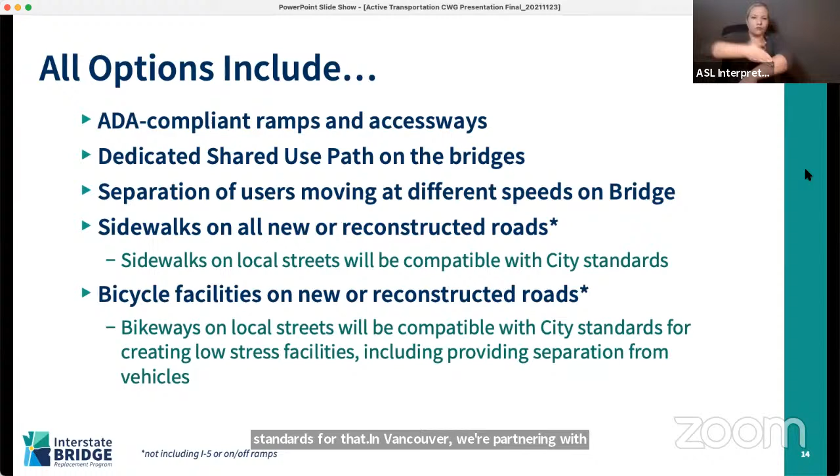Same thing for bicycle facilities—where a street is built or rebuilt as part of the program, it will include low stress bike facilities, including providing separation from vehicles. We looked at some of those pictures last time, the difference between just a striped bike lane on the asphalt versus one separated from traffic. City of Portland already has really good, strong, robust standards for that. In Vancouver, we're partnering with them as they develop theirs, so they're going to be pretty robust as well, and we're anticipating that.

Next slide. Where there are local street connections, those will be compatible with the local agency plans, for example the Hayden Island Master Plan. We don't know exactly yet where the transit stations will be—it depends on the type of transit included—but we know that we will provide great access to those transit stations, including bike parking and everything.

All of the options are going to include a reconstruction of the 40-mile loop trail. This is on the Portland side under I-5, closing a huge gap, a key gap in the network, and local street connections down into Northeast Portland. Many of the overcrossings across I-5 going north into Vancouver are going to be affected, and that's a great opportunity to improve the sidewalks and bikeways on all of those overcrossings—amazing opportunities for connections across I-5 and improving that for the communities. Wayfinding signage is assumed as well.

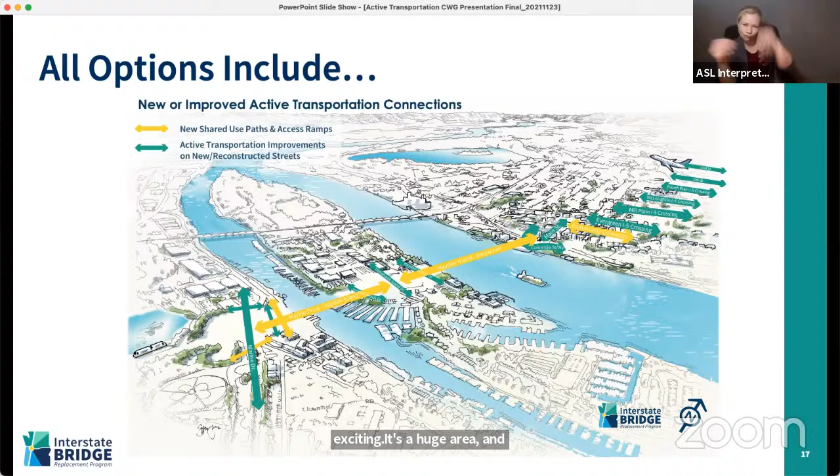Okay, next slide. And with that, we're going to talk a bit more. At the last meeting, we talked about the active transportation framework, and I want to revisit that just as a quick reminder so we can start to talk about how we're applying it. I'm going to introduce it and reminisce a little from what we talked about last time. Then we're going to dive into, like, that map I just showed is fine at a really big picture level—it shows the whole program area. We're going to break that down into North Vancouver, downtown Vancouver, and the Portland area, and have a chance to talk more about what all of this means. So let's dive in, and when we get to that I'll welcome comments from those of you very familiar with those areas.

Here we go, so just remember this—this is important. Anytime we talk about active transportation, we all recognize, and I heard some stories last time about how really horrible those conditions are out there today. Many of you know it intimately. So we aren't looking for a little bit better, we're looking for a lot better. And it's really important that we make it great and accessible for all. That's going to be critical for the communities and all the agencies to meet their goals for climate, for transportation, for community building, and for equity.

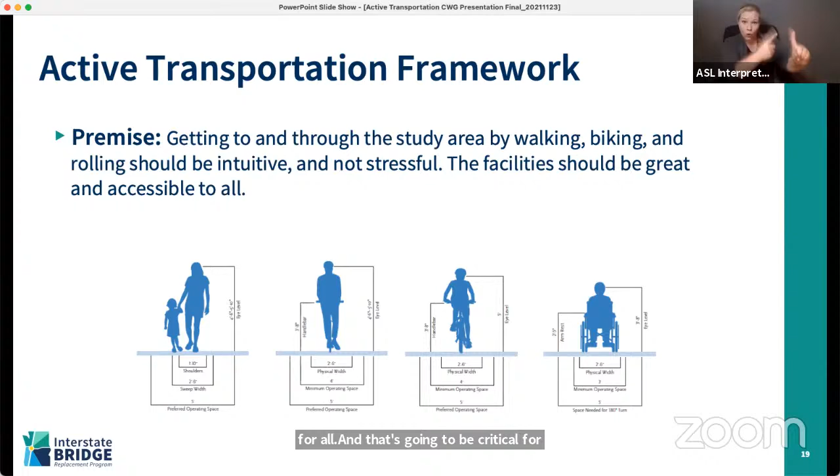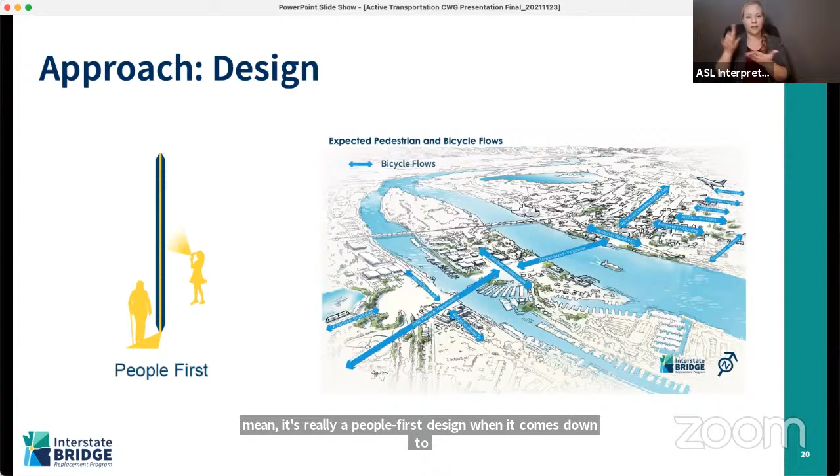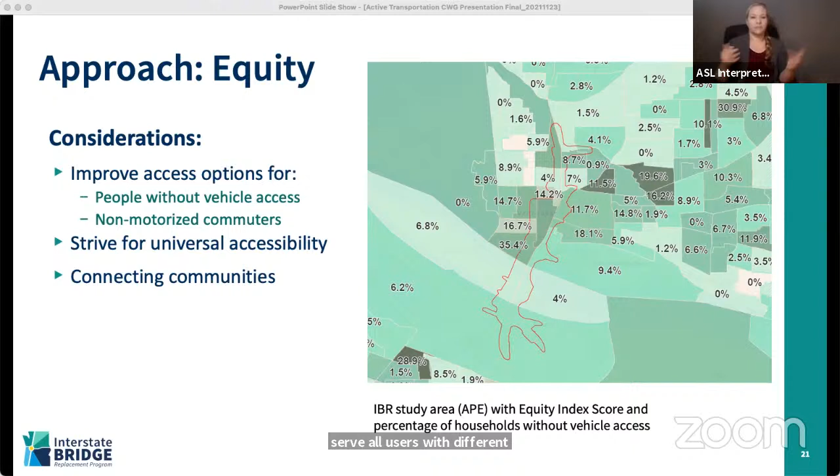As I mentioned earlier, we're striving for universal accessibility, which means maybe going above and beyond ADA requirements and thinking about how to truly serve all users with different mobility and availability. Connecting the communities east-west across the highway is going to be a really important part of these equity outcomes.

Next slide. Okay, so that's enough of me talking. I just wanted to kind of frame it all up again. And Derek is now going to dive into these maps. If you could maybe just let him explain the map to you, and then we welcome some questions, clarifying questions, comments in the chat. These areas, we feel like we're studying them all the time at this moment.

All right, thanks, Katie. So good to see everyone. Again, I'm Derek Abe, Active Transportation Co-Lead with Katie. So the next series of slides are going to show you some of the existing conditions that we've got on the ground today. And in addition to those, we've highlighted areas where we know there are likely to be some great improvements to the walking, biking, rolling networks. So we'll start on the north end in the neighborhoods.

Let's take a look at some of the facilities we've got on the ground there. As you can see, Columbia Street is shown as a proposed or planned bike facility here, but that's moving along. We're going to have some protected bike lanes on Columbia. That's going to be a really key north-south connection.

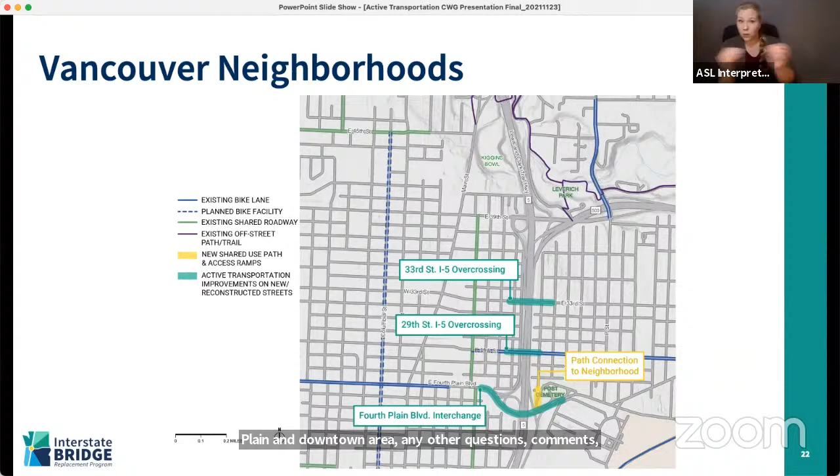Before we shift down to the Mill Plain and downtown area, any other questions, comments, thoughts on the Vancouver neighborhood section? All right, well, in that case, why don't we go to the next slide?

And so there you go. You can see we've shifted down a little bit. We've got the McLoughlin crossing, Mill Plain, Evergreen. What will become a new crossing, we're calling the Community Connector at the moment. That is a bike and pedestrian only kind of bridge or crossing over I-5 there. And then we've got a few others in the immediate bridgehead area.

One of the key things to note about this area is that we're looking at some pretty substantial improvements as part of this project. It is likely that Main Street will be extended so that it reaches down to the waterfront, and there will be a realignment of Columbia Way where it kind of curves around under I-5 and connects into Columbia Street.

So improvements to those streets as they're extended and reconstructed, and likewise improvements to the McLoughlin, Mill Plain, and Evergreen crossings that we have today.

The point that you made, Michael, about the vertical clearances is very relevant to both the bridge itself, the alignment of the interstate highway, and then the connections to the active transportation networks.

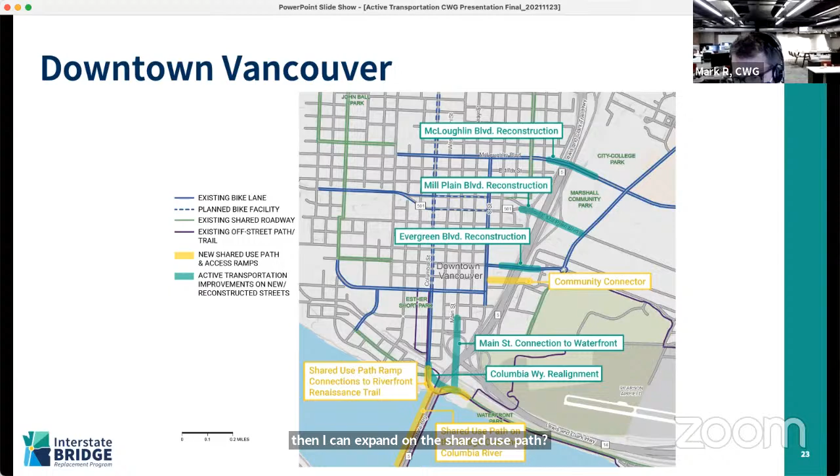In terms of, I like and I appreciate the different colors and the different types of facilities here. Could you trace, I'm seeing some purple, I guess what's happening, the shared use path stuff is usually the stuff that's most attractive to the most people. So is that making connections up to your community connector, which is a big investment? Like, what if I'm coming over the bridge and I want to sort of circulate through Fort Vancouver, the airfield, whatever, and get to that community connector and get back to the bridge, is there a way to do that so that I don't have to ride on a blue bike lane on maybe a busy street where I'm uncomfortable or something like that? So these investments can be linked together as opposed to just kind of dropped in here and there because there's an opportunity. I guess that's my question.

Derek, if you don't mind, I'll jump in on this because I think great comment, Mark. Think about this as just a puzzle piece. The program, the partners, all the agencies need to do exactly what you're describing to create a cohesive network. So what these maps show essentially are existing conditions as a base, and then one puzzle piece of what we are pretty darn confident that the IBR program will construct, these segments.

And that isn't where the story ends. But you're right, then it'll be also, what do the cities do? How do we, what other grants could fund other pathways or whatever? There's definitely still a what's next or what else. At this point, we don't have that information yet, but you're right, that is where this is heading. Right now, this is just one puzzle piece. Does that make sense?

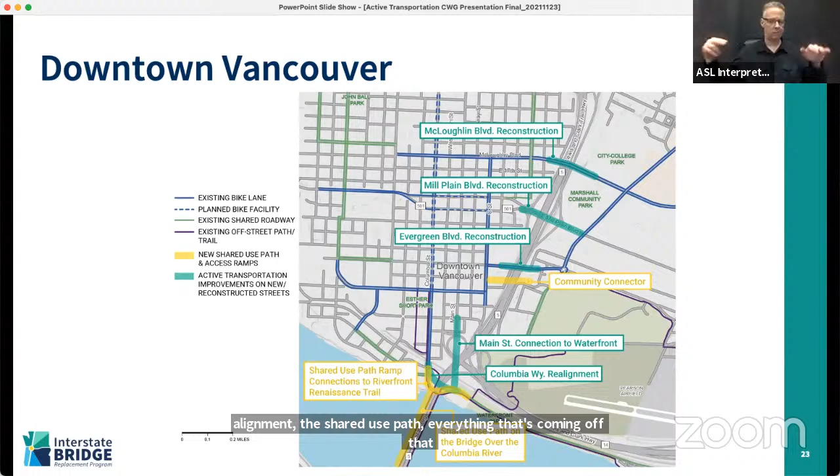It's going to start dropping down to meet the existing alignment, tying into the existing I-5 further downstream. So it's got to clear over that, but it also has to be under the Pearson Airfield's flight path. So there's a window, if you want to call it that, where we're aiming to bring the highway, the transit, and bikes and pedestrians all through there.

There's a lot of stuff already on the ground there that we're going to try to integrate with. There's a current alignment that goes under the railway. Why can't we keep it under the railway?

The current alignment goes - which alignment are you talking about, Marion? The current bridge goes underneath that rail line that runs along the north side of the river, it doesn't go over it. So you're asking why wouldn't this bridge option go under it? It's a good question, and I don't know that I have a clear answer to that, except that we know there's a couple things we have to consider.

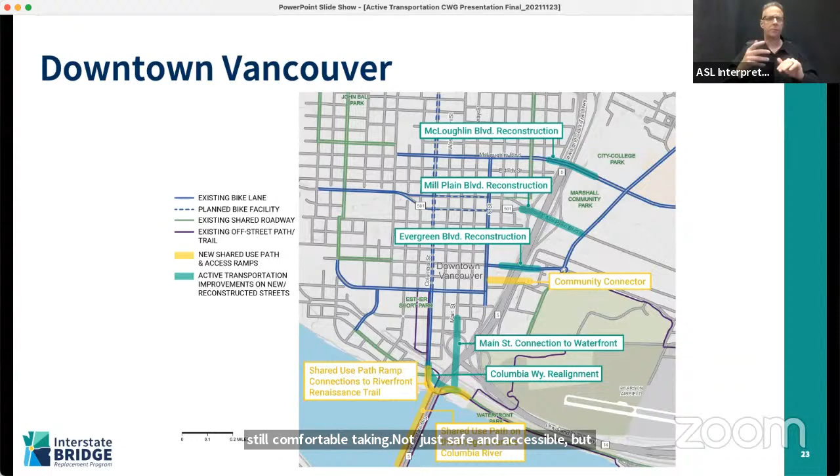Yep, exactly. And knowing that it needs to meet ADA accessibility guidelines, and it's got to be something folks are going to be comfortable taking, not just safe, not just accessible, but comfortable, means that the grades have to be approachable enough that people in mobility devices, people in wheelchairs, people pushing strollers are going to be comfortable getting from the ground to the path.

And you're right, it's going to be up there. With the various bridge designs, it could be anywhere from I believe 75 feet up to over 100 feet. So it's high up there. And to your point, we have to figure out a ramping situation that is going to enable folks to access it comfortably.

I assume there are going to be elevators too, though. I would hope - that's a good question. It's something that the team is looking into as well.

Okay, Katie, did you have something to say before we move on to Michael's question? Well, yeah, we'll have time to dive into this issue also a little bit later. So maybe just one more comment, and we have 2 more areas we want to talk about before the break.

Marion's question did get folks to start thinking about how the shared use path would land off of the bridge in this area, and that was a really good tie-in. There are several design and ramping options that we're exploring — that's kind of the short answer on this side of the water.

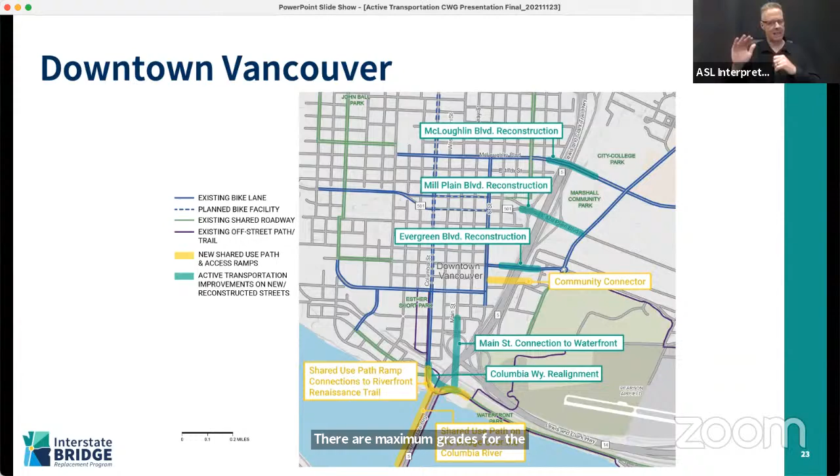How fast we are dropping, climbing, or ascending is really important. There are maximum grades for the highway, maximum grades for transit, and maximum grades for walking and biking. So all of those constraints, just the vertical clearances, kind of give us the designs we're considering today — they push us in that direction.

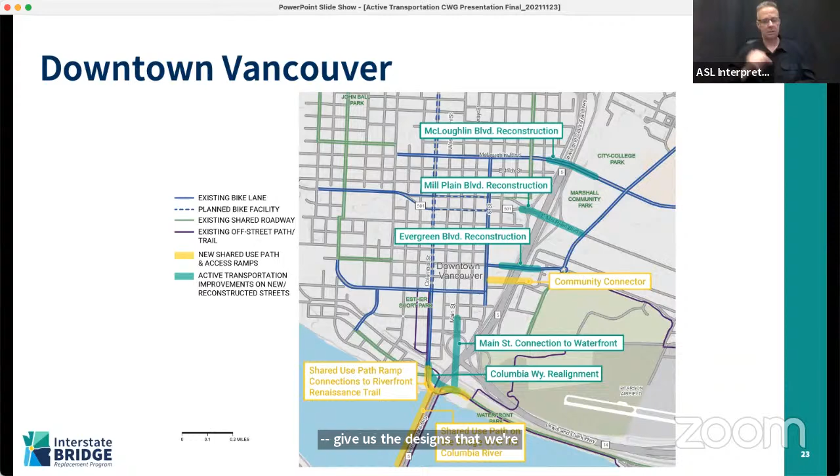And it is going to be a fairly high bridge. Kayla, could you advance the slide one? Because this next one is a good slide to continue to speak to these issues. So I think where we're going is a discussion of what the shared use path environment is going to be like on the bridge itself — if we consider everything we'd need to do to get onto the bridge, and then what that environment will look like once we're on it.

We know we want it to be as direct as possible, as effortless as possible, with a feeling of comfort both in terms of proximity to vehicles, big semis, and all the other traffic the highway's carrying, but also comfortable between users of the shared use path. We talked a lot about that last time — there needs to be some separation between folks buzzing by on e-bikes or race bikes on the weekend versus folks pushing strollers, walking the dog, with kids trailing behind on their bikes. It's got to be different environments for different users.

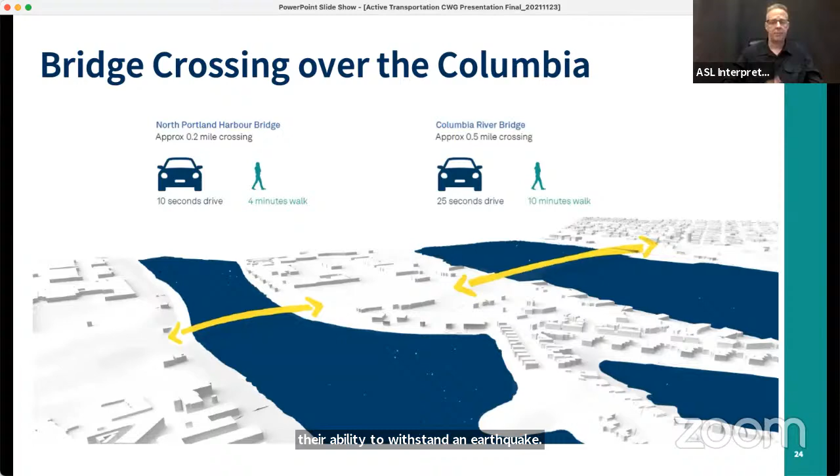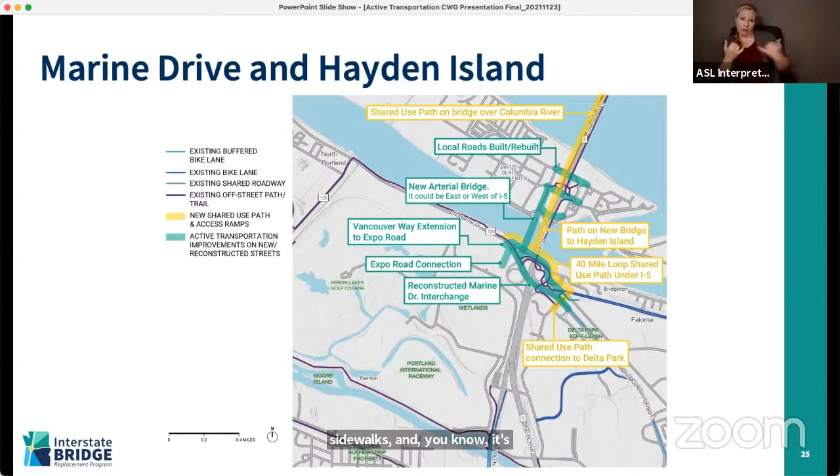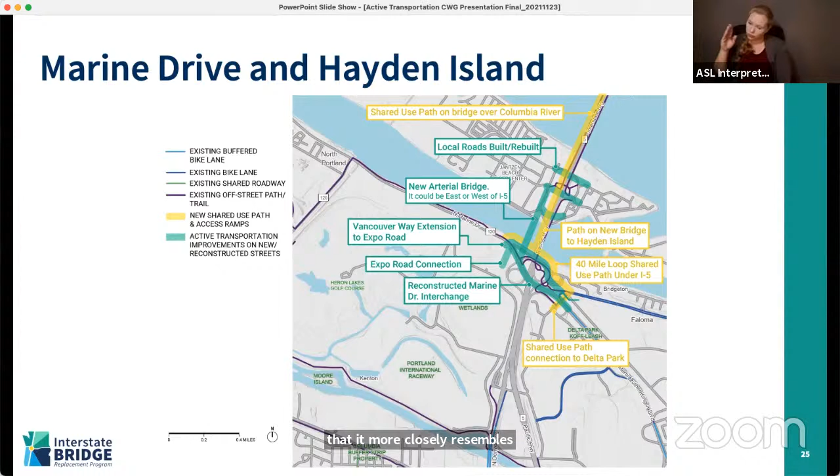So what we want to do is improve it so that it more closely resembles that yellow swath connecting Delta Park all the way up to the bridge - make it something more direct, more intuitive, more comfortable, providing access as well as local connections between the various neighborhoods in this area.

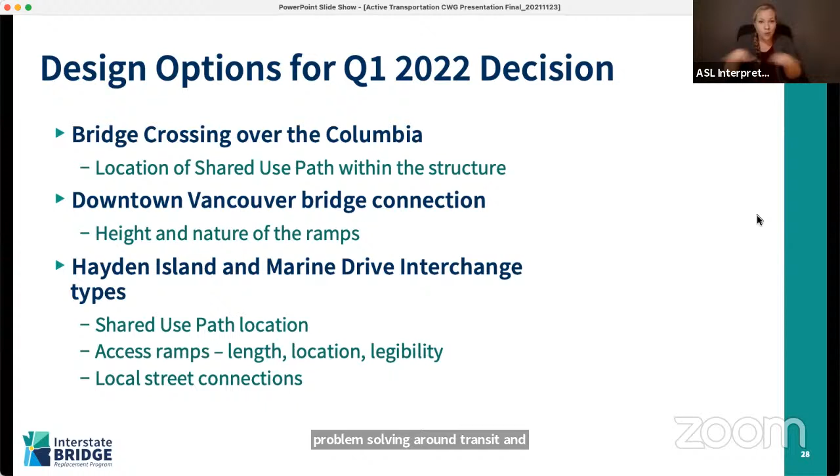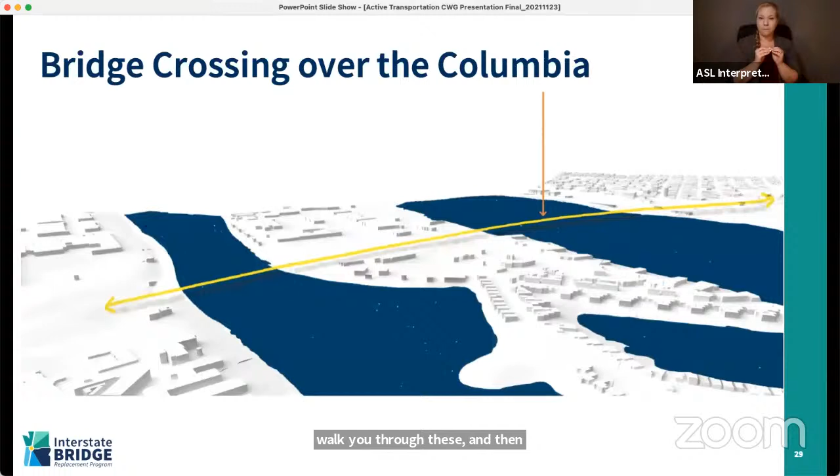So next slide. Okay, so we're going to start, kind of walk you through these, and then maybe if you have questions, put them in the chat. We want to make sure that we have a chance to really walk you through all of these, and we have a lot of time to go back and discuss them.

So Derek, why don't you dive in here with the options around the bridge crossing over the Columbia, which this little cute graphic here is just making sure it's pointing to the one over the Columbia.

There's also a bridge over the North Portland Harbor. So the option is really around where that orange arrow is.

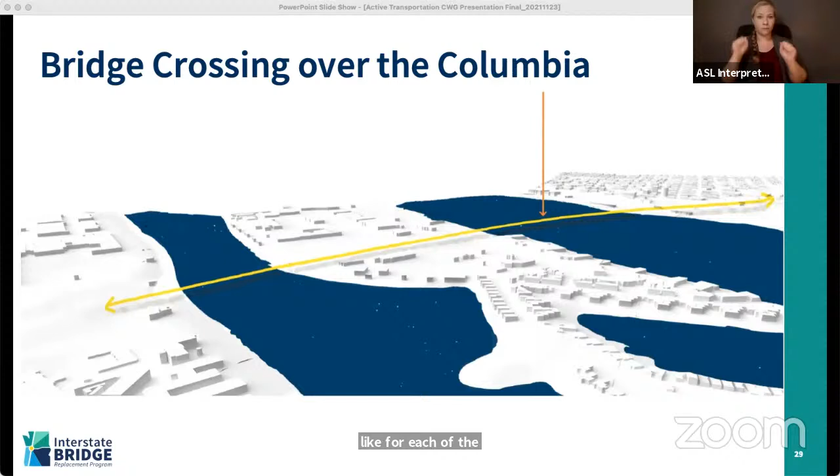So I think we touched on this a little bit earlier in the meeting, but the shared use path environment on the bridge itself, on the structure, is going to depend on the type of bridge it is and how the various pieces are configured. So there will be lanes for vehicles, there will be transit, and of course there will be a shared use path. We'll walk through what those various configurations look like for each of the design options, and we can have some discussion around the pros and cons and various considerations with each of those. So you can go to the next slide, Kayla.

Okay, so there are a lot of design options under consideration. There are a lot of variations and permutations of each of those options, but for our discussion purposes, and for the purpose of conveying to you how these are different and how we might compare or contrast them, we've broken them up into 3 options.

So for the bridge itself, there are a couple of different ways that the shared use path fits into the design. With option 1, we have 2 bridges, and I'll go into these further. The next few slides zoom into each of these and we'll talk about them specifically. Option 2, again, 2 bridges, and then option 3, what we're calling a stacked alignment, is a single bridge that's carrying everything over the Columbia.

And with each of these, we've got dedicated, the same number of travel lanes, a dedicated transit guideway, and then a dedicated shared use path area. So we're studying all of these various options. Again, there are a lot of pieces and a lot of variables at play that mean different things depending on the option, and all of that's going to be informed by the feedback that we receive from you tonight.

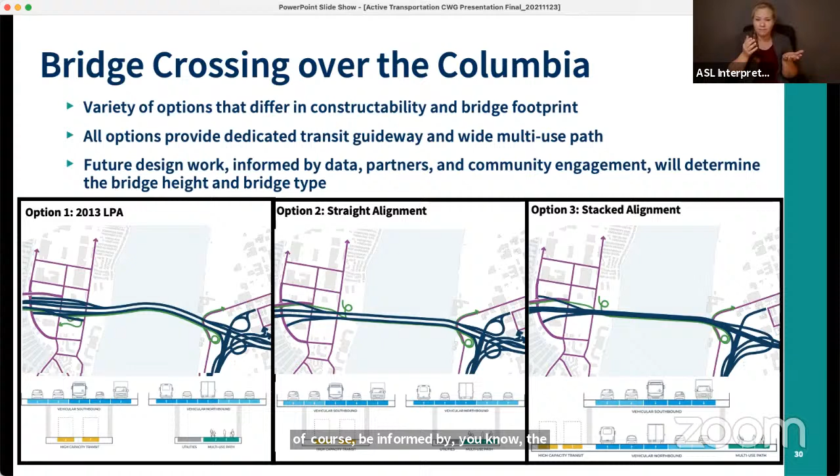So why don't we go to the next slide, and we'll talk about option 1, which we're calling the 2013 LPA. This was the design that advanced out of the CRC process back in 2013, and we're using this as a starting point in some ways for this particular design option.

Option 1 is the 2-bridge configuration. One of the bridges is for northbound vehicular traffic, and the other bridge on the downstream side, the west side, is for southbound vehicular traffic. It's on that southbound side where high capacity transit is going to be running on the lower level. And then on the upstream, east side, we have the shared use path, the multi-use path, running on the lower level as well, kind of tucked in under there.

So you can see from the plan view top-down map above the cross sections that there are a number of connections we need to think about. On Hayden Island, we need to think about how this path is going to connect back down to the local street network. Likewise in Vancouver, when we make landfall there, we need to think about how we're going to get that shared use path down to the street. Here we're showing a ramping scheme, you could call it a double helix, a double loop that loops back down and around Columbia Way, tying into Columbia Street. So again, this is a concept that was loosely identified as the preferred alternative in the CRC, back in the CRC heyday.

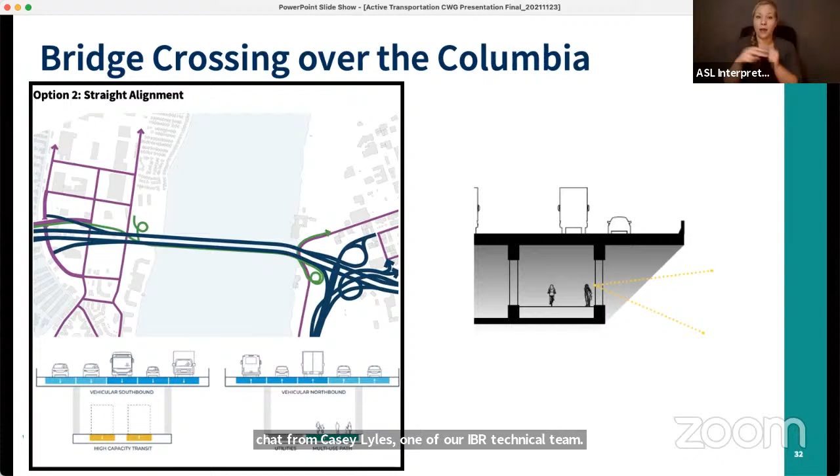And there's a note in the chat from Casey Lyles, one of our IBR technical team: yes, the existing bridge must remain in place until the new replacement bridge is functional for traffic, including active transportation. All right, got it. Thanks, Casey.

Mark's got his hand up again. Go ahead, Mark. Derek, can you confirm this green path is on the east side of the bridge? So views from Mount Hood would be unobstructed from this side, looking at the Columbia Gorge and Mount Hood. That's correct. I'm thinking about user experience, as opposed to the previous scheme that had it on the other side. Being able to look at Mount Hood might be attractive to active transportation users, and I'd argue more attractive than the downstream West Hills, Sauvie Island view.

And as we think about the bridge as a destination, a viewpoint, a view like that is an obvious benefit to it being on the upstream east side. Sorry, the north arrow must have been cropped out of the map image there, but yeah, north is to the left there.

Derek, can you say a few words about the space within the bridge where the path would be? That'll be a difference between these two and the third one. I want you to touch on that before we move to option 3.

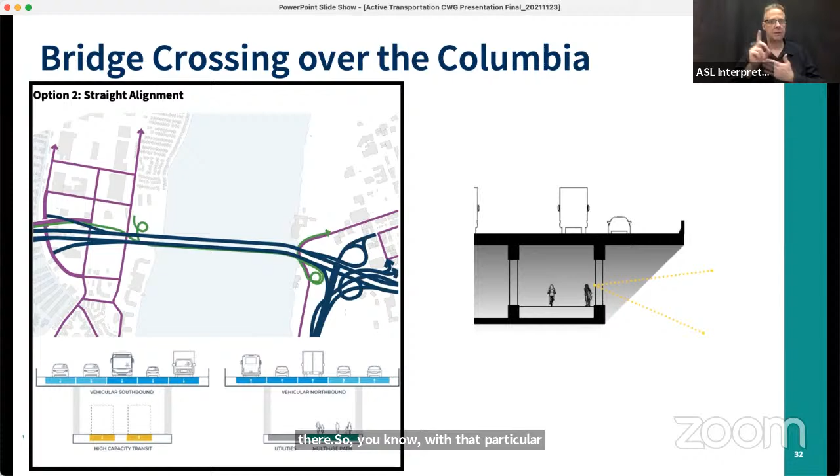So with that particular design, there will be a lot of design considerations for us to make it a place that is not only hospitable and safe, but one that is comfortable, that hopefully maximizes view, but also reduces or minimizes the noise levels with the traffic overhead. Because it's covered, tucked under there, it's more sheltered from the elements, but that also has implications for the type of environment and user experience under that upper deck.

We don't want it to be dark and ominous. We don't want there to be the sense that you're entering a long tunnel, the sense of enclosure that resembles a confined space. We don't want that. We want it to be open, a place where people can look out and enjoy the views from. So think about what that might be like when you're on the lower deck, under that upper deck, with all of that northbound traffic above you.

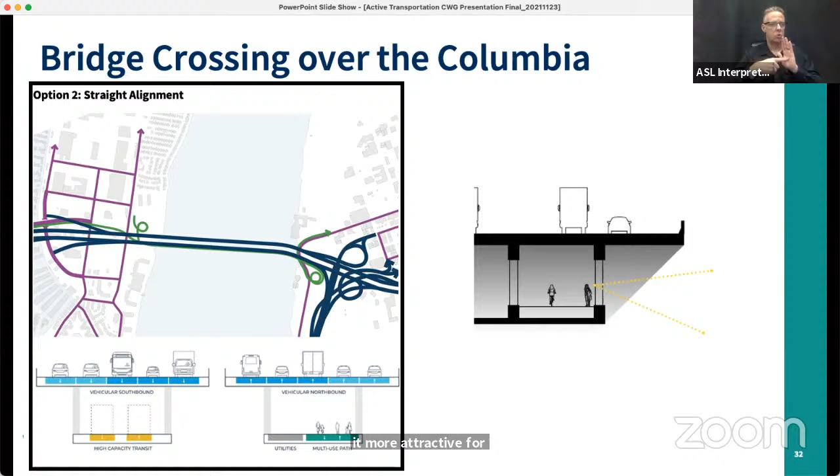And so the next option we're going to show - go ahead to the next slide, Kayla - shows a different approach, which is more cantilevered pathway off the side. Again, this has pros and cons: more exposure to the elements on those rainy February days when you're biking across the bridge, but also perhaps a little bit easier to control the space and monitor it, maybe less of a tunnel-like feeling.

So I think it is fair to just think about all of the different ways the space is going to be used. We'll have environmental design problems to solve either way, but that is a key difference between these two.

Yeah, and there are of course pros and cons to both, and there are design solutions in both cases as well. One thing I hear quite often with designs like this is that you're exposed to the elements - you're going to get rained on, hailed on, and in some years snowed on. But there are ways to kind of solve for that.

You can have awnings, you can have some covered areas, and in some cases it may not even matter, right? If you're riding across this bridge, you're likely riding from a transit center, or from home, or from the office - you're coming from somewhere and already riding in the elements to get to the bridge. Here, I think one of the main differences is that you're high up in the sky, and that wind coming off the Columbia is strong. It's going to be raining sidewards at times, and the gusts are going to be blowing hard, so that exposure to the elements is a little bit different in this bridge environment.

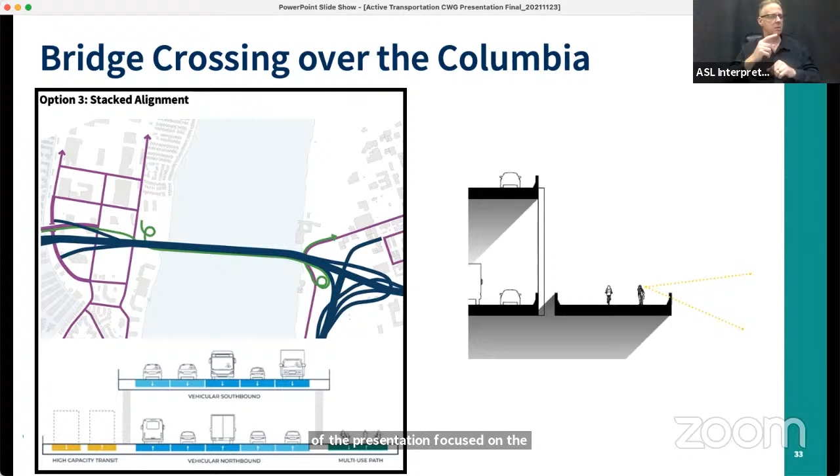So again, this last part of the presentation focused on the bridge itself, the bridge environment, and the various configurations of the shared use path in relation to the rest of the structure. Now we're going to dive into the Hayden Island Marine Drive area to look at a couple more options.

Oh, before that, we'll talk about Vancouver - sorry, had my slides out of order. So we're going to zoom into downtown Vancouver and talk about the corkscrew. Michael, any particular questions you had about that, we can address them here. But basically what we're showing in each of these two options is the shared use path landing on the east side of the interchange, the I-5 SR14 interchange, and touching down on the waterfront, kind of parallel to Columbia Way, then as we move under I-5, parallel to Columbia Street, which it turns into.

As part of this project, we're looking to realign Columbia Way so that it tees into the Columbia Street, Columbia Way intersection on the west side a little better. But for these graphics, just know this is the idea: we're coming off the shared use path on the east side of the bridge, whether tucked in or cantilevered off the side, and ramping down to the waterfront to connect into the Columbia Renaissance Trail that's there today.

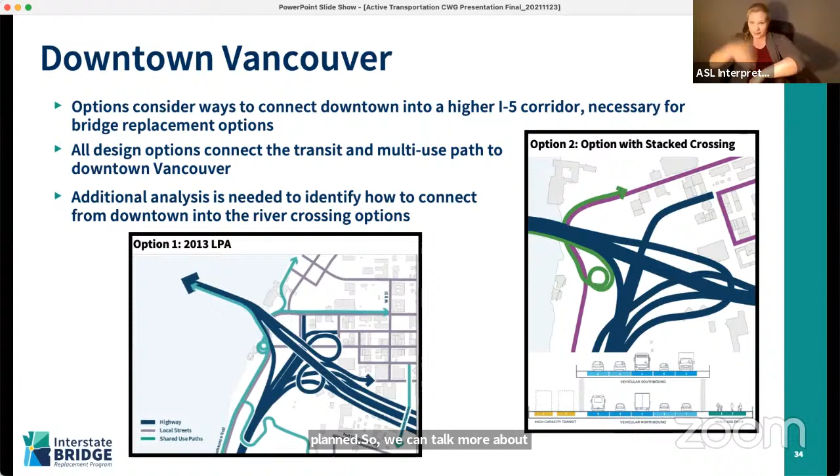In the interest of time, why don't we move on to the next section here. As I was saying earlier, we're going to zoom into Hayden Island Marine Drive because there's a lot going on here, and we want to give you a sampling of the types of connections and all of the considerations that go into them with each of these designs.

We know there are a few general assumptions we can make with the project, what we know is going to be the case in this general area. We know we're going to replace the North Portland Harbor Bridge. There will be an arterial or local street connection that connects Portland to Hayden Island, Marine Drive to Hayden Island. And we know we've got to tie into the existing bike and walking networks. We know the 40-mile loop trail, the Marine Drive path, crosses through this area under I-5. How do we tie into that? That is a regional trail, that is a regional connection that we want to make.

Connections to transit - while we don't know the exact location of the stations quite yet, we know that those connections have to be made as well. And depending on the interchange environment, depending on what streets connect to I-5, and what streets have more of a local kind of access function, those active transportation connections are going to look and feel different as well.

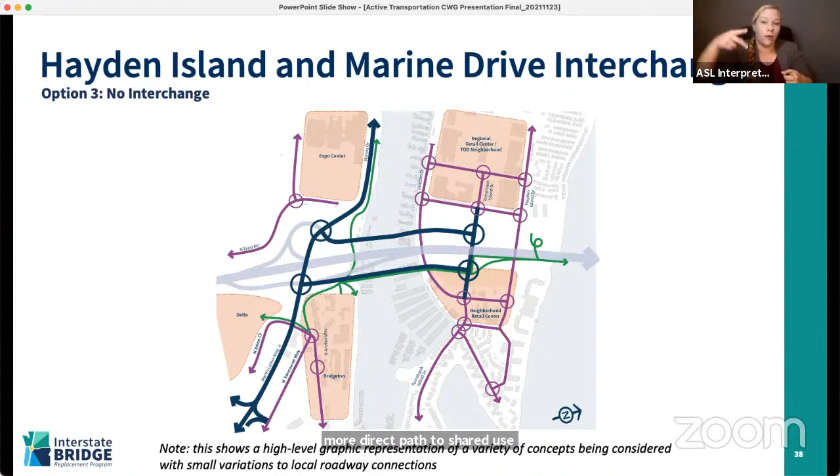So, that being the case, now that we've got arterial bridges on either side of I-5, what we can do with the shared use path is run it along the east arterial. What that accomplishes is a much more direct path for shared use path users, whether going to and from Hayden Island or going all the way between Vancouver and Portland. The path is on the east side of I-5 there.

So I think that about covers it at a high level. Do we want to go into discussion?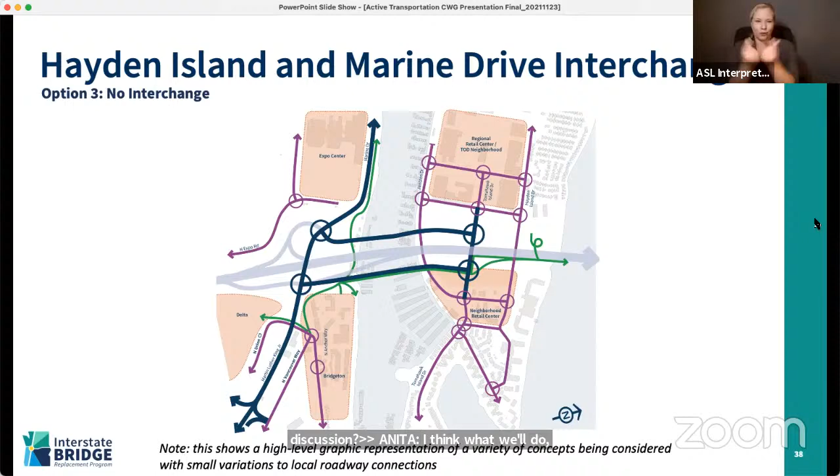Okay, so Barbara, you said you kind of wanted to wait. Would you like to have some comments? I know people asked questions about the elevator versus the helix versus the ramps and other sorts of things. Yeah, thanks for asking.

I agree with whoever said that if there's an elevator, and I don't know how you do this in a cost-effective manner, but to really have some redundancy, because it seems like elevators always break down when you most need to be in a hurry. And the other thing was the person who mentioned that even though somebody using a wheelchair might be fit, which I'm actually not, it's really difficult to keep pushing up or down a really steep grade. If they have it where, every couple of whatever feet, it kind of levels off for a little while, just like on a long ramp, and then keeps on, that would be really helpful.

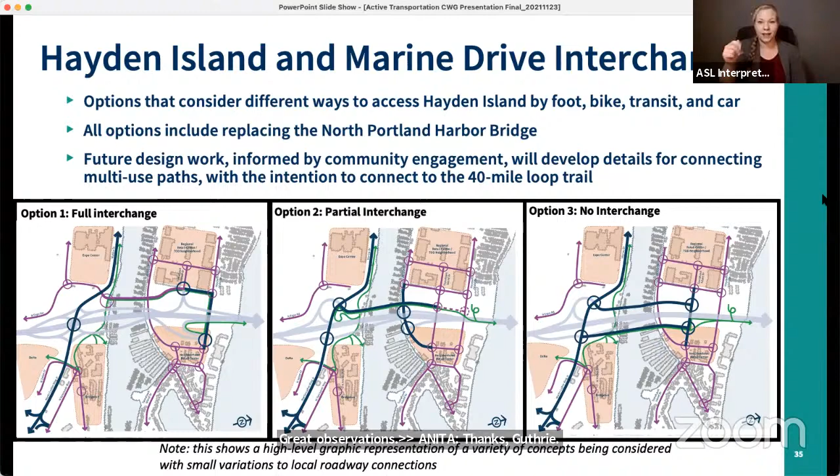At this time, we're not currently planning future meetings, but as program planning evolves in the next several months, we may wish to reconvene this group and ask for additional feedback about the active transportation experience. So, next slide.

I know a lot of this was given to you this evening, and you may want to take a look at it and have more comments. So Kayla's going to send these to you again, so you have an opportunity to review them, ask some additional questions if you need to, and give us some more feedback. We'll give you maybe 2 weeks. Does that sound good? A week and a half? What's today, Tuesday? Yeah, maybe by next Friday.